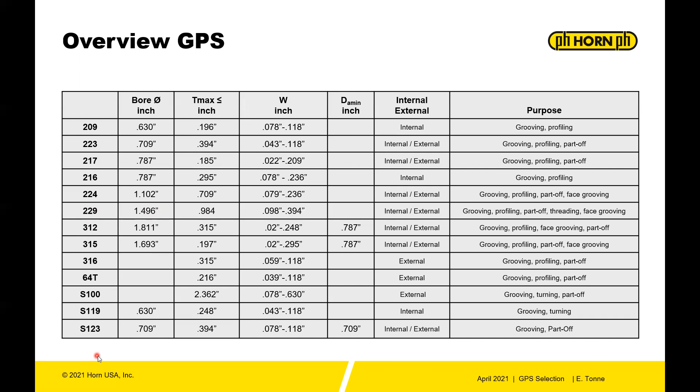Graphically, the GPS system can be divided into internal and external, and purely external. So the internal systems are the 209, the 216, and the 119. So 119 means that it has one index. By not having a secondary cutting edge, that allows you a deeper Tmax into the part while maintaining a smaller bore diameter. The internal and external, you have the 223, the 229, the 217, the 315, the 224, the 312, the 123. And then on the external groovers, you have 316, 64T, and S100.

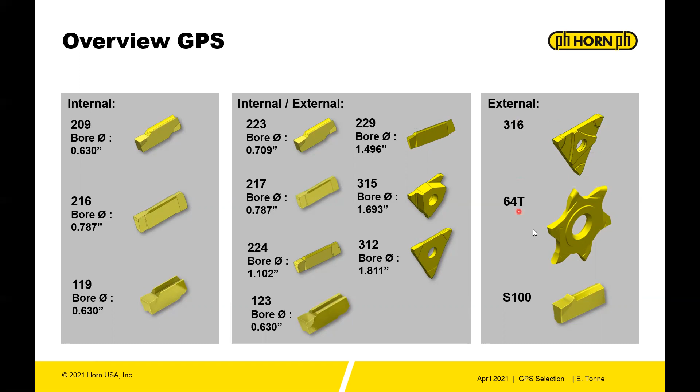Delving deeper into the part number, when you see an S, that means it's precision sintered. Doesn't necessarily mean that there's no grinding on it, but for the most part, this is a sintered part. It's precision sintered to have the accuracy. There may be some ground parts, maybe the flank of the insert is also ground, but typically you see the S designation when you have some kind of preformed geometry on the rake face. So the S just means precision sintered.

Then you have the series of tool. The series of 224 is going to have its compatible holders. A 229 is going to have its compatible holders. When you switch series, you can't switch holders. So a series pretty much locks you into a set of holders for that series of tool. The width, the width being in millimeters in this case. There are a few inserts that are in inch, but you'll see a U designation on that for inch tooling. So width is in millimeters, so this would be a 3 millimeter insert width.

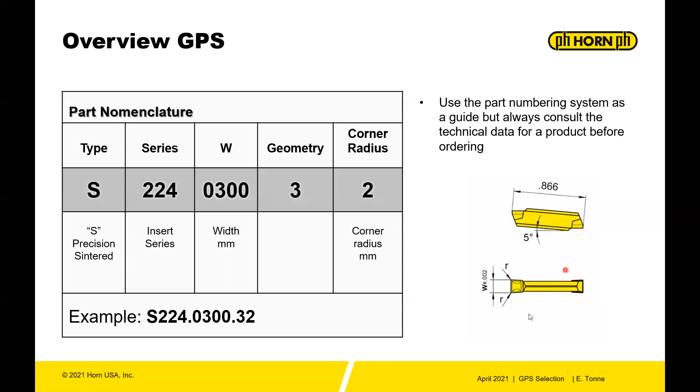Geometry, so that geometry can vary from a 3, a 5, an L, an A. Those are all given in this part of the nomenclature. Then you have a corner radius at the end. Use the numbering system as a guide, but there are exceptions to the exception, so don't necessarily rely on that. Rely on the part dimensions given in the catalog to make your selection.

Another key component of all the different systems is that there are insert sizes. So the size of an insert is given. There's a column on the catalog page for the size, and you need to match the holder size and the insert size. So progressively, as these get larger, you'll tend to find that you have bigger width of groove. The size is in line with the locating surface and not the width of the insert. Sometimes it corresponds. Sometimes you have a size 5 insert and it's 5 millimeter wide, but it's more or less the locating surfaces and not the width of the groover.

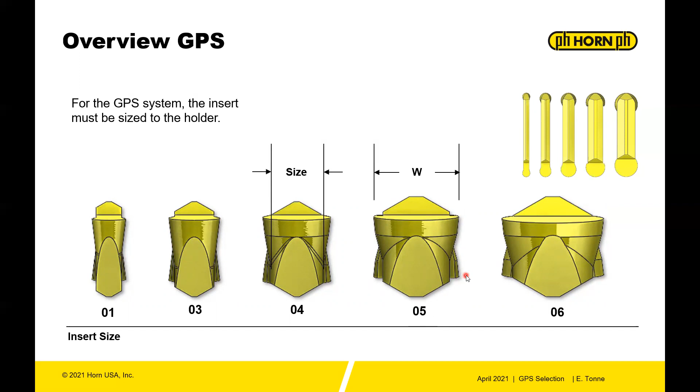Another thing to point out, as I did earlier, was that the number of cutting edges is given at the front, so the number of indexes. So a 119 insert has one index. A 123 has one index. The S100 system has one index. So the value in these systems is you can use them for deeper part off and deeper grooving applications because you don't have the geometry on the back end to interfere.

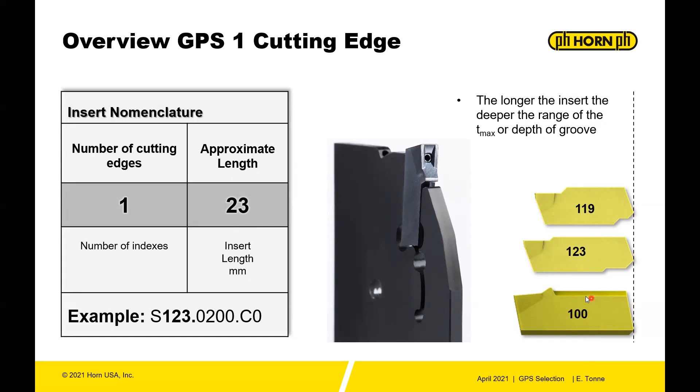And then again, the approximate length in millimeters. So you can see a 119 is a shorter blank or insert than a 123. And then a 100 is bigger than the 119 and 123, which kind of diverges from that logic, but that's why I say it's approximate.

Also, you have 2 cutting edge inserts. So each of these insert series have 2 indexes on them, and then an approximate length. Same situation. So you can see a 209 is much shorter than a 216. A 217 is just a little bit bigger than a 216. A 223 is a little bit shorter in blank size, depending on the pocket size. The 224 and the 229 being the largest size of groover.

So when you know that you have a deeper groove, you're going to go for a 229 or a 224. If you need to get inside a bore, you know you're going to go with a 209 or a 216. So those are opposite ends of the spectrum.

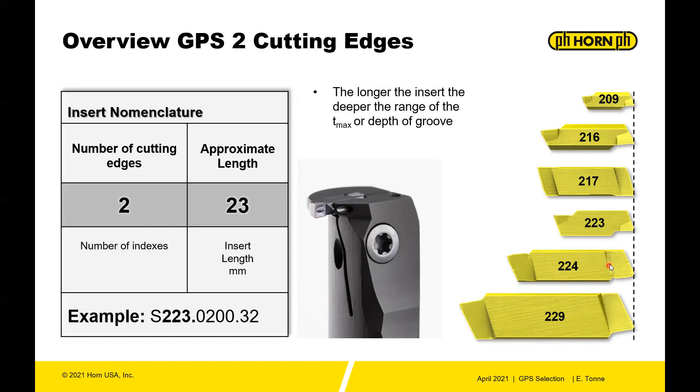We also have 3 cutting edge inserts. So you have the 316, the 315, and the 312 system. The 316 is a direct mount, 315 is a direct mount pocket, which just means there's a screw that goes through the insert into the holder. And then the 312 is a top clamp. So the hole can be kind of deceiving. On the 312, the hole there is not for clamping purposes. It's more or less manufacturing purposes on Horn's end. So 312 is a top clamp, 315 and 316 are direct mount pockets.

You also have different seating sides, so different configuration, and that means those tools are not interchangeable with one another's holders. So keep that in mind when you're selecting a system. 316 and 315 are systems designed for really heavy side loads like you would find in threading, for instance. That's why you'll find a lot of threading product in the 315.

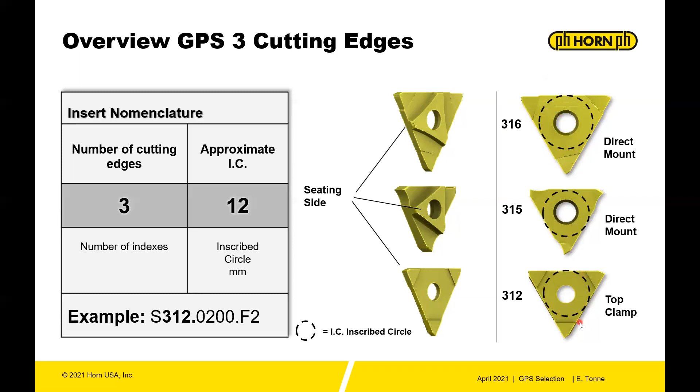Then the 316 is also a direct mount pocket, but it has the capability to do narrower grooves, but with good rigid contact. And then the 312 has a lot of different types of insert. It's a very broad system with a lot of applications.

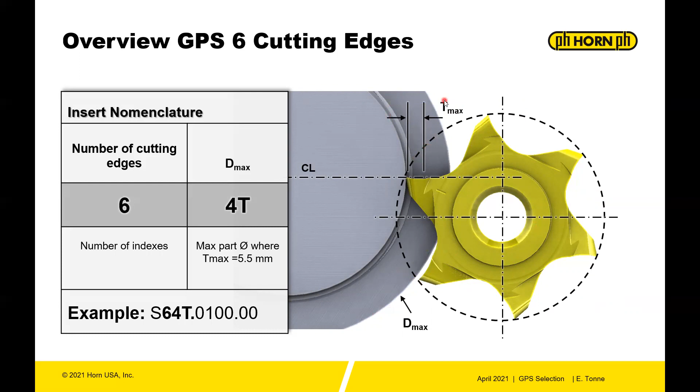You also have the 64T. So 64T means it has 6 indexes. And then you have the Dmax, the max part diameter, where Tmax is 5.5 millimeters. So the maximum depth of cut for the 64T would be 5.5. That is dependent on the diameter. So as you can see, to clear the insert, you do need to pay attention to the diameter of the part in order to get the appropriate Tmax. All these values are given. You look at the insert page for 64T, you'll see that there are tables giving the Tmax based on the diameter max of the material.

Just to make sure we solidify some of these terms, because these are important, so we're all speaking the same language. The minimum bore diameter is Dmin. The reach or distance from the front of the part to the farthest point is L2. The depth of groove is Tmax. That's short for the German Tiefe, which is depth of groove. Width of groove is W, and Dmax is the maximum workpiece diameter.

So the Dmax is tied into the style of the holder. For instance, this holder that's shown doesn't really have a Dmax because you run out of depth of groove long before you would run out of Dmax, because the insert has a smaller Tmax window and the holder doesn't need support underneath the insert. You therefore don't have a Dmax value on certain types of holders.

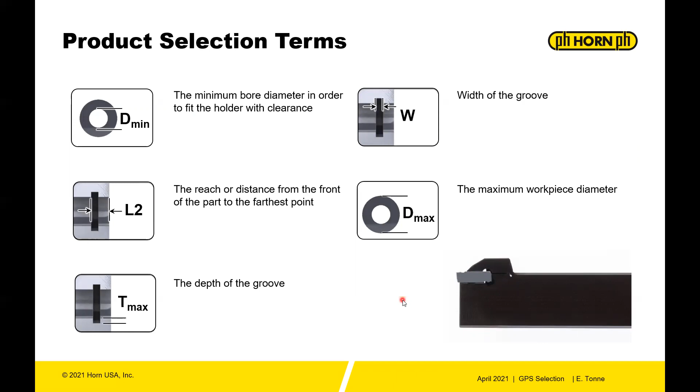So how do you select a holder correctly? The logical process to follow to find the right system: first, is it internal or external? Is it an internal grooving or an external grooving application? Like the 209 and 216, those are the ones that are going to be targeted for the internal grooves. And then how many edges? What's the requirement for the edge economy? Do you need 2 edges, or 3 edges? That's going to help you decide between using a 312 or using a 224. Then the application.

So for instance, if you chose a 312, maybe it doesn't have the applications necessary for threading. So you would then switch over and look at the 315. The D min, so especially important on the internal grooving, you need to have the proper D min.

Tmax, so different systems like the S100 has a huge Tmax when you're doing a part off application or a very deep groove. The L2, so do you have the holders available to reach into the part to get to where the groove is? And then Dmax is the least limiting because you have a lot of holder options. So the Dmax comes from the holders available and how much clearance you have underneath the insert.

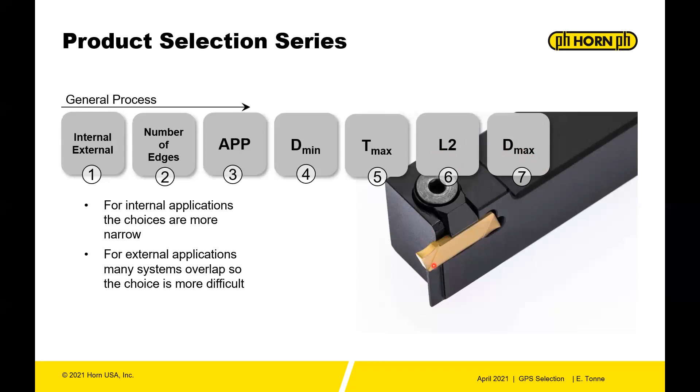You can also see though that the 224 system is a good choice when you need longer L2s into the part. Also, when you need a fairly small bore diameter and your Tmax needs to be fairly deep. So the range of Tmax for the 224 system is pretty broad.

If I want the deepest reach into the part, I'm going to choose a 312 system. So a 312 system is very long reach into the part. My limitations are though that I'm not going to have a lot of Tmax, so not a lot of depth of cut. And then my bore diameter is going to have to be a little bit bigger for the 312 system.

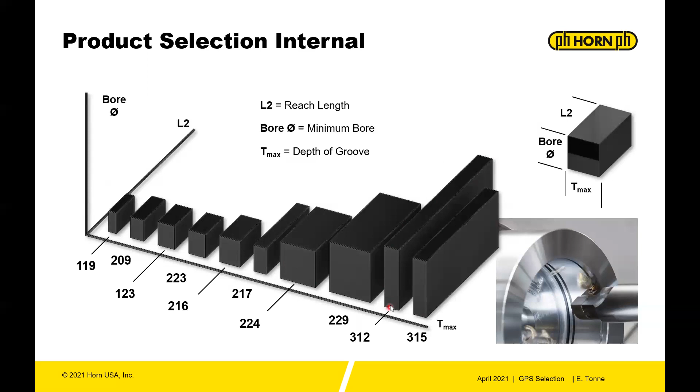If you look at external grooving, the three main criteria are the Dmax, so the max diameter of the part, that's related to your holder, the Tmax or depth of groove, and the W, width of groove. So those are the three sort of main components you want to start with on product selection.

The 223 is also an option, as well as the 312. So the way that those inserts are held in the pocket, they leave you plenty of room to not really worry so much about the diameter of the part. The 64T system and the 123 system, those have more constraints on how big of a diameter part that you can run with them. 315 has a nice Dmax. The 224 is kind of in the middle, and the 229 also has a nice Dmax, Tmax, and width.

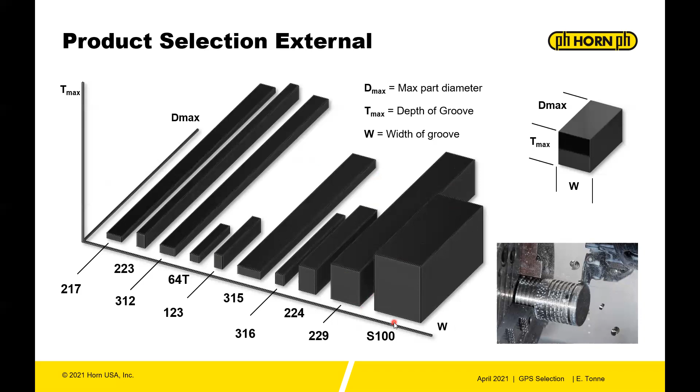Here's kind of a down and dirty explanation of why you need the clearance, why you need to worry about Dmax. Basically, the clearance on the holder is your issue. So as the diameter increases, you need to pay attention, because you can actually collide with the holder. I know some end users have modified their holder to clear, but that's not a great idea. The best is to get an appropriate tool that has the clearance for your diameter. So keep that in mind. It's not always thought of in external grooving, but it does matter what the diameter of your part is in relation, especially to your Tmax.